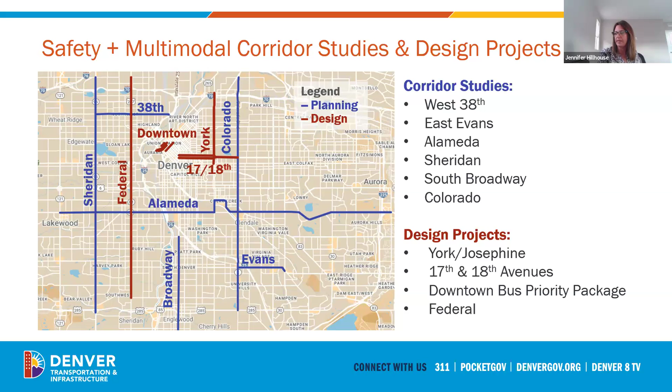So really focused in those priorities where the investment is needed most, the attention is needed most. So you can see the corridor studies that are in planning as well, and those are the corridors highlighted in blue. And then the design projects, things that we're advancing into construction, as York, 17th, 18th, our bus priority package, as well as Federal. So the first one up, Broadway, really, really important corridor. We just celebrated the multi-use path along the corridor and other enhancements for safety. But now the region is starting to look at how we reimagine Broadway. The extents here are 25 to Highland, so really extending the work that we've just done. And this is a collaboration, we know that our goals don't stop at our boundaries. We really have to partner with our sister agencies, sister cities to make sure that our regional goals are met. This project kicked off in the fall of 22 and is just coming to commencement with some of the recommendations. This is really looking long-term, a high-level visioning document setting the stage for where we need to drive investments into the future. And the final plan is planning to be published, or has been published, on the 8th, just yesterday.

So what we looked at here is long-term vision, really focusing on safety and mobility, but also looking at our commercial corridors along the corridor and economic development. With that, although we are looking long-term, under that umbrella, what can we advance in the near term to really showcase how this street can operate in different ways.

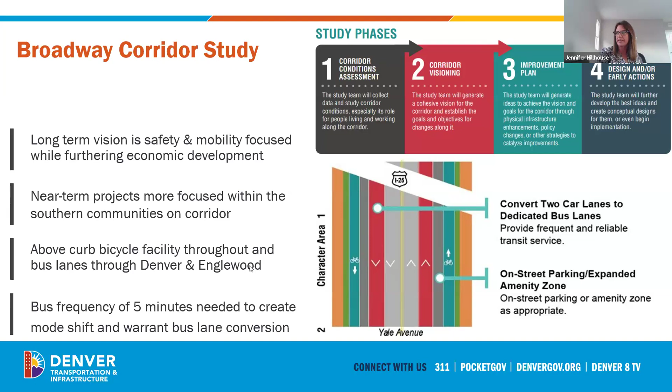We're looking at above-curb bike facilities throughout, as well as dedicated bus lanes through Denver and Englewood. That was really something to celebrate because we thought it was going to be a harder conversation, but certainly our region is coming along with this. And then looking at that bus frequency of 5 minutes to create the mode shift we needed along the corridor. So you can see a cross section, the final recommendation coming through that work.

York Josephine, another really exciting one, and I think one you'll hear from Amy about. This was another one where we set a long-term vision but also looked at near-term improvements, and it's moving into construction in July. We are taking 4 lanes and converting into 3. This is a high injury network, lots of crash history along the corridor, moving through a residential community. So really that 4:3 conversion is in a segment of the corridor, and then that longer term is what we think about to the north.

York used to tie into the highway and no longer does - it tied into I-70. So that allows us to think through this in a different way and really create a community street out here, and really slowing speeds is our goal.

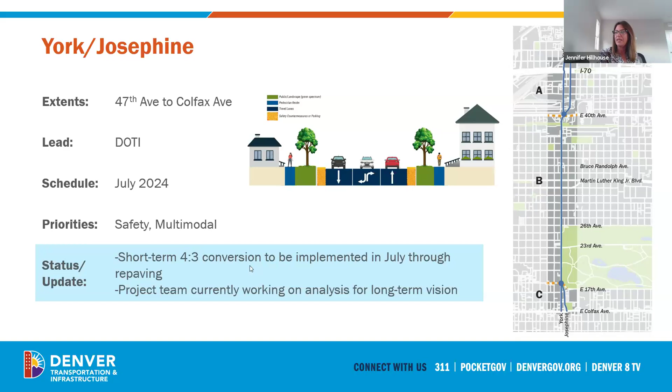Evans is another one, just recently moving through the process, but it will wrap up here soon. Colorado to Quebec, another high injury network - we are leading this process and really focusing on safety, multimodal, as well as green infrastructure, which is a high priority on this corridor. And how we can green and clean our water before it enters into the system. So we're in phase 2 of engagement, which will end this month, and then we're concluding our alternatives analysis.

This is also, and you'll see at the end of the presentation, what we call road safety audits, which we pull in to really think about short-term safety improvements we can do today, like through work orders, making immediate action along the corridor.

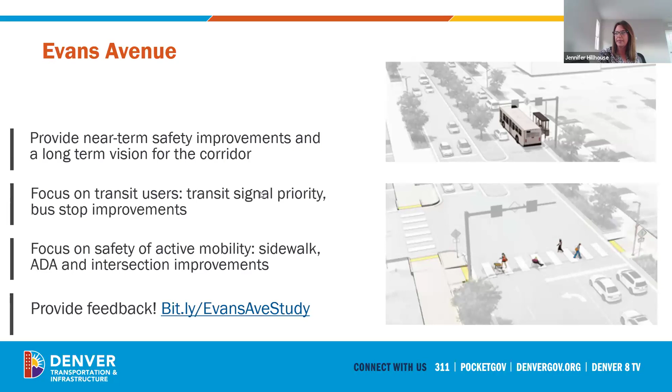So here's some of the concepts coming through. A lot of access management is the priority here. We have what we call a suicide lane - a middle lane that allows for left turns without a lot of organization and understanding of how we operate the street for vehicles specifically. So how we clean that up through potential medians, but also giving priority to our transit as well as people walking and ADA accessibility. This is one you can get involved in, and it would be great to have your feedback on.

Alameda is the next one. This is being led through DRCOG, but certainly we see ourselves almost as a co-project manager. This is moving through Lakewood and into Aurora, looking at the entire extent of Alameda. This is a BRT corridor, it's a high injury network - all of these are - but really looking at how do we connect, how do we provide that safety, improve our transit, and the vibrancy. That's the economic development piece.

So thinking about how we create the vision - you see some themes here - but also that short term, what we can advance immediately. You'll hear from Amy, and not to steal her thunder, but this is a focus area of ours. Alameda is a bright line, and not a great bright line, on the high injury network. So really, what is the action we can take right now? That could look like signal retiming - we saw great improvement on West Colfax, reducing our fatals by 87% just with signal retiming.

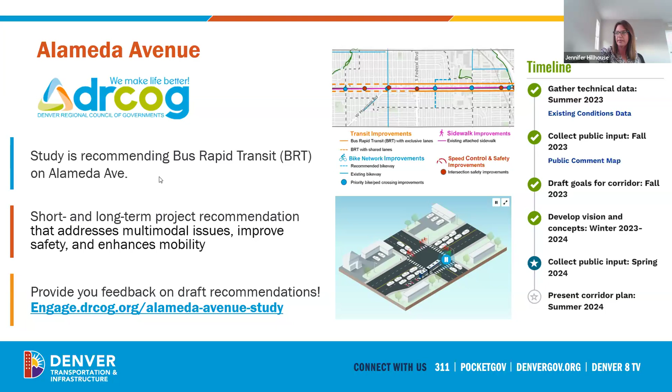Like sign density will come online immediately, and then also some of those crossing and intersection improvements that we'll be able to turn around really quickly out of this alternatives analysis. But it also gives us the ability, on all of these, to drive development and ensure that we're redeveloping the street with our partners in a way that aligns to an ultimate idea in a reimagined street.

38th Avenue, a really critical corridor for us in addition to all the rest - Sheridan to Federal. We are leading this and plan to complete it this year. This is also, of course, safety and multimodal, but green infrastructure is also a high priority on this corridor. We're moving through alternatives analysis today.

Really doing that analysis is where we're at. Then we'll move into design on those near-term recommendations and then developing that plan for the ultimate vision.

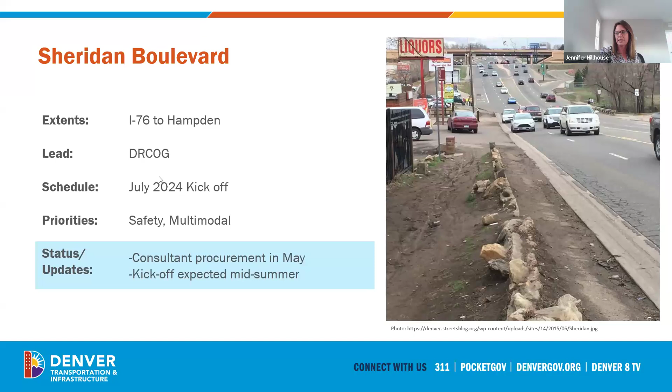Sheridan needs a lot of work, sidewalks specifically right-of-way is certainly a challenge. This is also a study being led out of the region, the entire extent from I-76 to Hampden. We are just kicking off, going through procurement now, and we'll plan to kick off in midsummer, really with a focus on safety and multimodal, but pedestrian safety is really the goal here. We're active in RFP now, so not a whole lot we can discuss since we're just kicking off, but the scope is looking at existing conditions. We'll have robust engagement with community, developing that ultimate vision, and then the short-term improvements.

Colorado Boulevard, this is kind of a two-pair. This is being led out of the state, out of CDOT, 52nd to Hampden. We plan to have recommendations this summer, and this is really a safety and multimodal analysis where the short-term improvements are coming in first, but ultimately it's about how we bring in bus rapid transit along the corridor. The state is committed to turning service in the very near term, but prior to that is understanding through that analysis what we can do in the interim. So that second part of the pair is the BRT.

This is advancing a full alternative analysis to get us prepared for federal funding to advance bus rapid transit. Three alternatives are being analyzed right now: mixed flow BRT, side running BRT, and center running BRT, similar to what you see on Colfax.

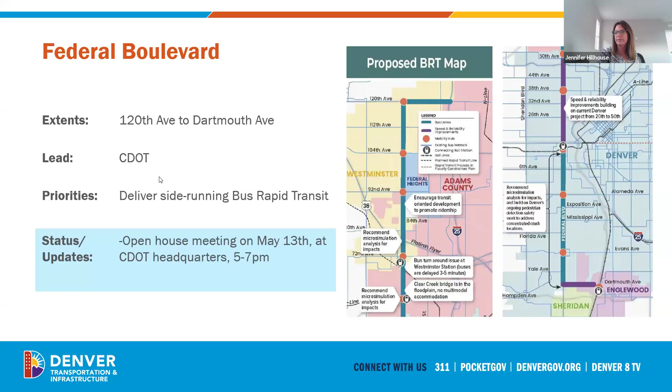And then Federal Boulevard, similar to Colorado, being led out of the state, out of CDOT. The extents are 120th to Dartmouth. We went through alternatives analysis, kind of pre-AA, and determined through city analysis that we would have side running, and that's what the state is advancing and looking at, turning service in that same time frame as Colorado, in 2030.

Then just wrapping up here on the RSAs, these weren't on the original map of the corridor studies because they're a bit different in process and analysis. These are road safety audits where we work to understand a crash picture and identify mitigation measures appropriate to that crash picture. The team goes out, we analyze existing conditions both in the dark and in day. We know that nighttime functions and operates very, very differently. If you think about Federal, we have 80 miles an hour.

Traveling along the corridor, where we might not see that in the day, so really making sure that our improvements align to all conditions. And these are really fast turnaround.

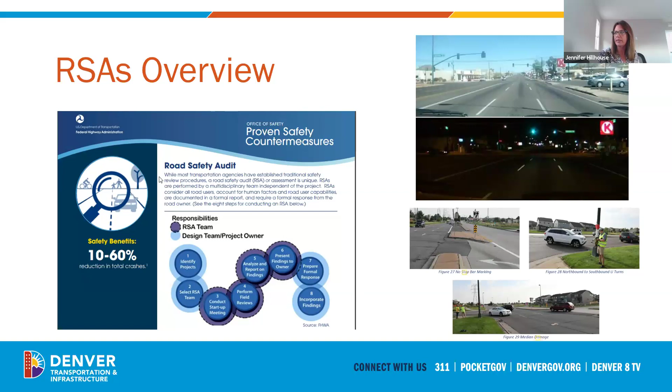So for instance, Evans isn't shown, but that is an RSA that we have working. These are part of a Safe Streets for All grant that we received. So if we think about Sheridan, that was one I shared with you all around DRCOG, this is embedded into some of that work and working to understand what we can do in the very, very near term.

So think quick build as we think about North Federal, Park, 20th, Sheridan, Quebec, Colorado Boulevard, pulling out, so we're coordinated within the efforts that are happening. But then the goal and really the outcome here is to invest and improve immediately.

And that is what I had for you. So I will stop sharing so I can see you and am available for any questions that you may have.

So that's a lot of work. A lot of it is concurrent work. And I think you said that although the designs, the outcomes, the recommendations are quite different among them, the thing that's in common is you're focusing on the high injury network.

Is that right? Yes, and the transit priority network. Okay, and the road safety audits, are those also high injury network focused? Yes, all on the high injury network.

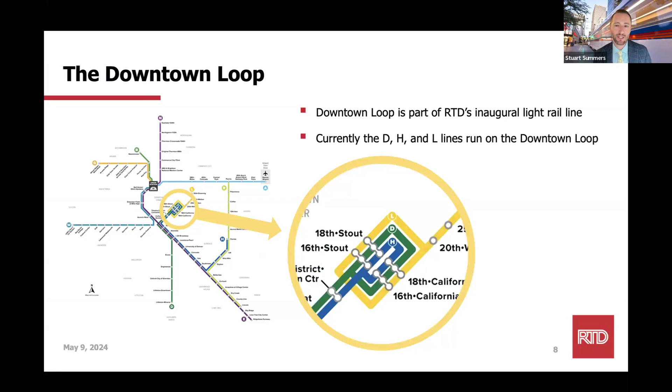So the first project I want to talk about is our downtown rail reconstruction project. This summer, we will focus on what we call the downtown loop. This is part of RTD's first light rail line, this inaugural line that opened in 1994. Currently, the D, H, and L lines run through the downtown loop, and as we're all well aware, the trains operate in a street-running capacity. So there's not a dedicated right-of-way, which means pedestrians, vehicles, and cyclists are also entering this right-of-way when trains are not there. There's a number of public utilities that exist under this rail alignment that we have to take into consideration as we're doing this project.

The downtown loop also has what we call paved track. Some parts of our system are open ballasted, which you can see in this picture on the right—this would be the track you would commonly think about. But in the downtown loop, we have this paved track, which takes a little bit extra work to do this full reconstruction effort.

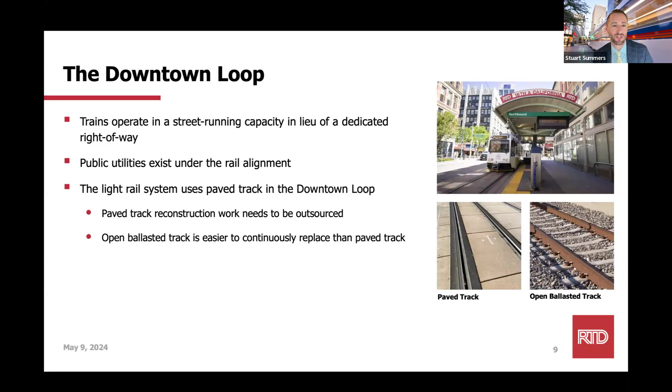Before I jump into this phase coming up this summer, I want to emphasize that we've been doing some isolated projects since 2012, and I think we're probably all familiar with some of the service impacts that have happened during this period of time. We've been targeting some very isolated parts of the track, and we've now reached a point where we can't continue to do these Band-Aid fixes—we have to do this full-depth reconstruction in a very focused manner instead of focusing on a little bit of track during periods of time.

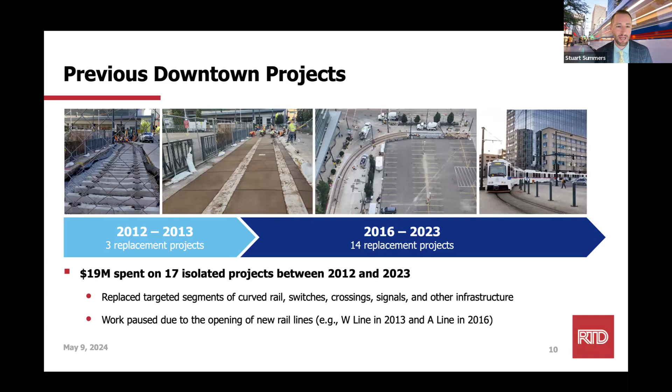So this project is focused on planned closures versus unplanned service disruptions. I mentioned that this part of the system is 30 years old, and it was built to last 30 years, so we're focused on what the next 30 years look like for light rail. How do we ensure that this investment is maintained?

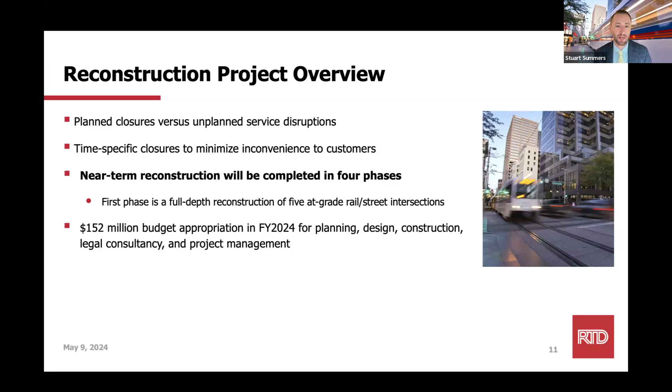This will happen over 4 phases in 2 years. The first phase, which we will be doing this summer—we're only doing one phase in 2024—are what we're calling 5 at-grade intersections. $152 million has been appropriated for all 4 phases. For this first project, we will focus on those 5 intersections.

I already mentioned the 30 years, really trying to ensure that we maintain these assets in a state of good repair and then mitigate these service disruptions in a planned manner.

So the 5 intersections project will kick off May 26th with our May service change and will run through mid-September, September 15th. Not all the intersections will be reconstructed at one time. We're going to do this through a progression, trying to limit this impact as much as possible. We've been working with the city and county of Denver on street closures, traffic detour plans, really trying to ensure that we're maintaining access to businesses and residents in the area.

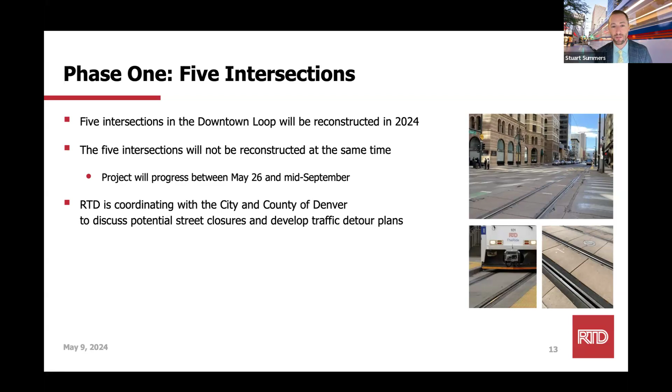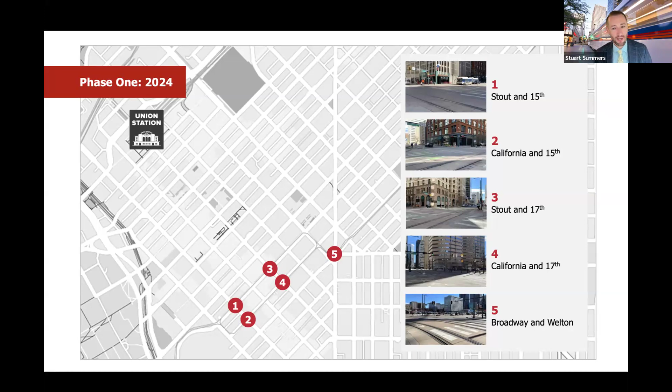So these are the 5 intersections that are part of phase 1, between May 26th and mid-September: Stout at 15th, California at 15th, Stout at 17th, California at 17th, and the Broadway and Welton intersection. As we're all very familiar, a lot of traffic crosses these intersections, driving over the tracks. After 30 years of vehicles, a lot of it RTD's own buses, it's really done damage to these tracks. So part of the reason is it's time to pull everything out, go down multiple feet, and do a rebuild.

So rail impacts for this project: the D line will be rerouted to Union Station, so we'll go from Littleton Mineral Station to Union Station. The H line will also be rerouted to DUS, going from Florida Station to Union Station. And then the L line service, which goes through the loop and out the Welton corridor, will be suspended during this project. We're encouraging customers to use bus route 43 — it closely mirrors the L line as a fantastic alternative if you're trying to access along the Welton corridor and into the downtown central business district.

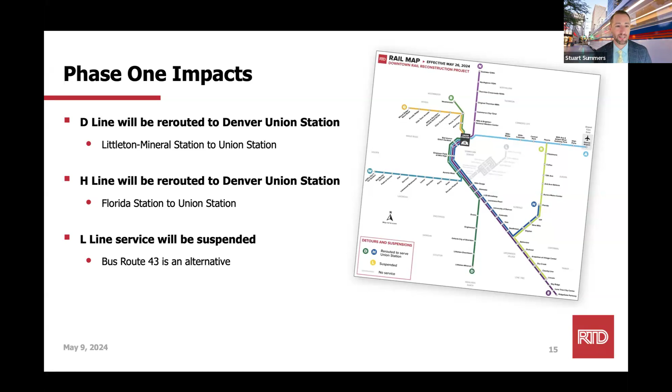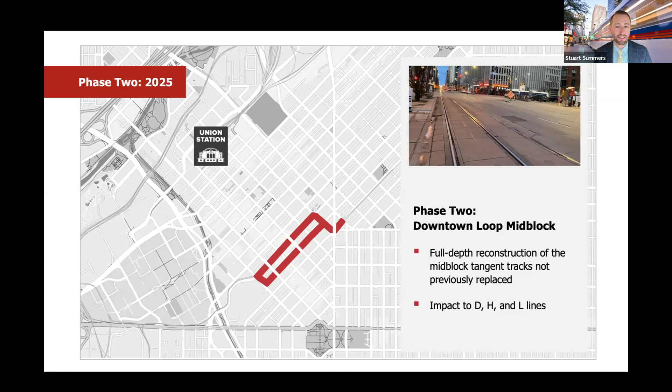In 2025, we will focus on phase 2, which is going back and doing repairs on a full depth reconstruction of the mid-block — the areas between the intersections that haven't been previously replaced. This will have that same impact on the D, H, and L lines.

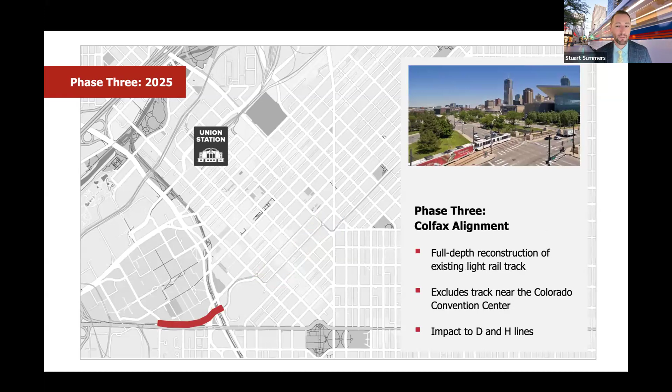Phase 3, also next year, will focus on the Colfax alignment, going out from the convention center out to about Colfax at Auraria Station, impacting the D and H lines next year. Phase 4 is the Welton Street corridor — same thing, a full depth reconstruction of the existing track on that corridor, also doing some station accessibility enhancements at that same time, with an impact to the L line in 2025.

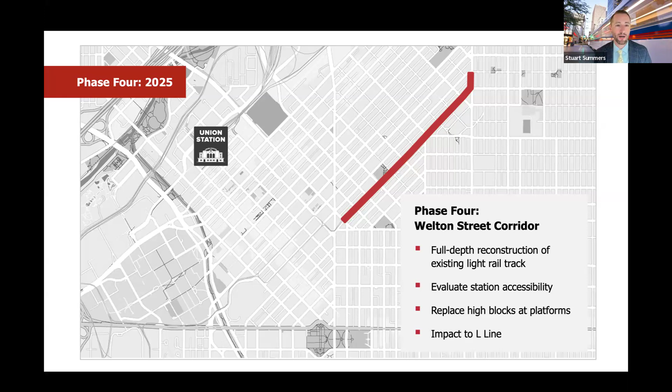So these are the 4 phases over the next couple of years, really impacting this oldest part of the light rail system. We've really been trying to be proactive at ensuring that customers, community, and stakeholders are very well aware of this project.

If you haven't visited our website, we have our Rail Project webpage, constantly updated with information. We're going through about 250 outreach tactics right now — we have a paid marketing campaign underway, a lot of banners, digital signs, social media outreach, really trying to ensure that the community is well aware of this project.

We're also underway visiting businesses and residents in the area to ensure they're aware of the impact and any questions they may have. We also have a stakeholder partner toolkit, so for this group especially, if you're communicating with community members or individuals who may be potentially impacted by this rail project, we have resources you can download in English and Spanish — news release copy, newsletters, sample social media posts, photos, video. All these resources are freely available for anyone in the community to use as you're helping to be an extension of our team and communicate some of the impacts brought on by this project.

The second thing I want to focus on is the coping panels project. This is the second and final phase of a 2-year project along I-25, impacting the E, H, and R lines. The coping panels are essentially those retaining walls that run along I-25.

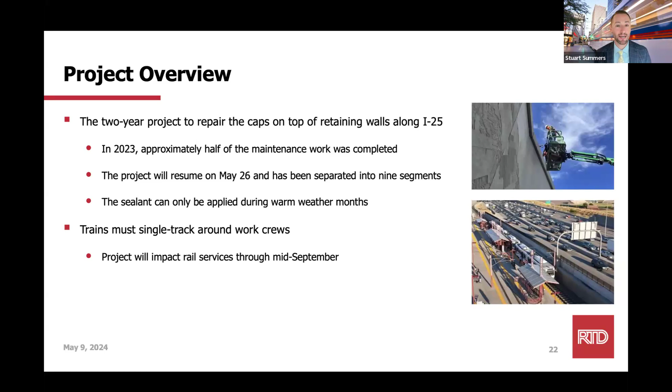I know this has been a very painful project. We hear a lot of customer questions and concerns about the coping panels project, but we are excited and looking ahead to having this wrapped up this year.

For service impacts related to coping panels, train frequencies will be temporarily adjusted between May 26th and September 15th. R line will continue a 30-minute frequency, and then E and H line trains will be adjusted to 1-hour frequencies. The reason for this is with that single tracking last year, we tried to do it at about a 30-minute frequency and realized we weren't able to keep a consistent schedule. So after meeting with a lot of community groups and getting a lot of feedback, we're adjusting to this 1-hour frequency because we feel we'll be able to provide a better schedule and better on-time performance.

Trains will still do that single tracking, but anything north of Southmoor Station will have 2 trains each hour that will go to Denver Union Station. So we're encouraging customers, if you're north of Southmoor, that's essentially a train every 30 minutes into downtown.

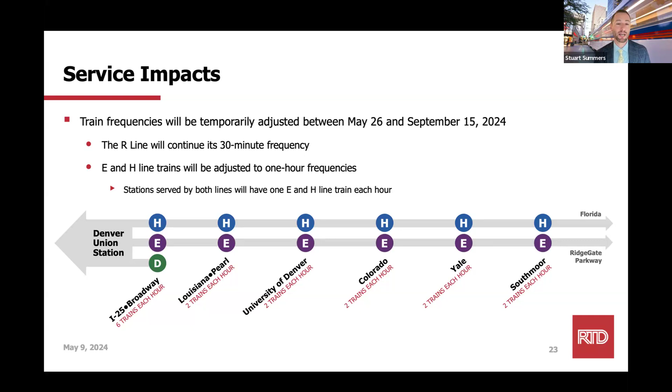Also, try exploring other ways to reach your destination, albeit by bus. There's a lot of bus service, and we're trying to help customers understand there may be other alternative methods outside rail that you can use to reach your destination using RTD.

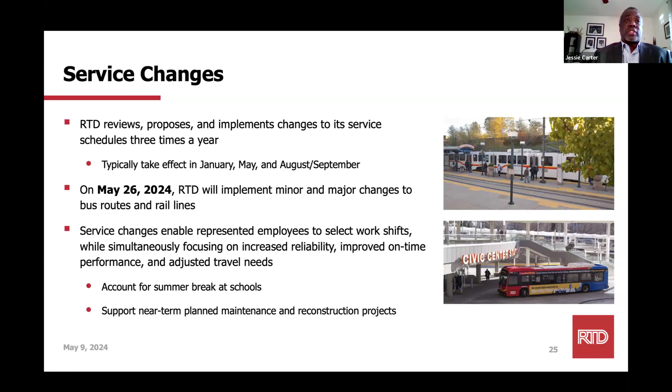So I'm not going to read every single one of these changes. I promise you that it would take too long and you'll probably be tired of hearing my voice already. However, we have a number of the changes that Stuart had mentioned.

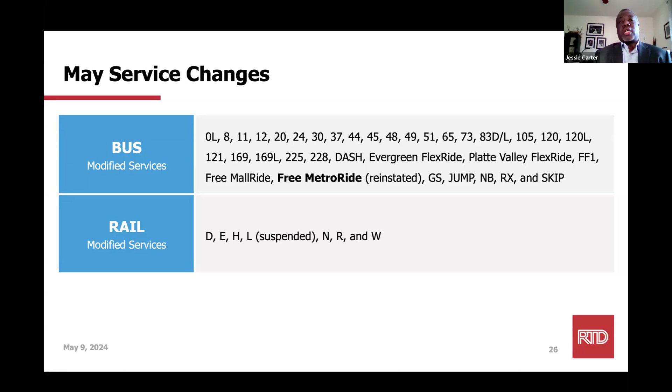Next slide. Hopefully what I've explained in the previous slide makes this slide a little easier and shores up exactly what we're talking about as far as our span of services and how they're impacted, and more importantly, how they're not impacted.

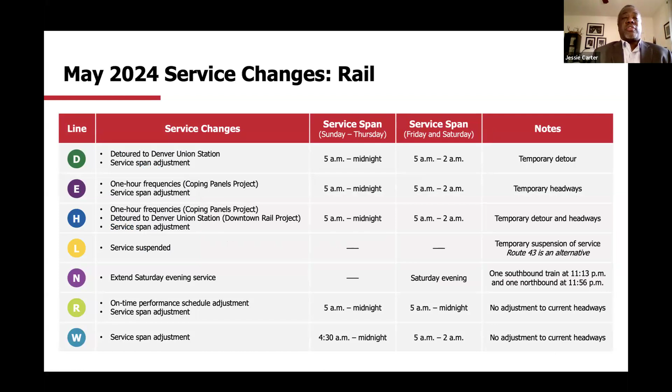Looking at the D line, the detour to Denver Union Station - some of you might remember the old C line, which we used to operate between the Southwest Corridor and Denver Union Station, so it'll be on that pattern. The E line will have 1 hour frequencies with service span adjustments Sunday through Thursday, but not Friday and Saturday. The H line will also have the service span adjustment and 1 hour frequencies due to the coping panel.

And the L line service will be suspended. For that suspension, we are pointing people to Route 43. Yes, we know Route 38 is also another alternative, but we're pointing to Route 43 because it actually has capacity to take on the additional ridership, and also provides a direct connection to Auraria, which we know is a very strong ridership generator for the L line.

On the N line, as I mentioned before, we're extending Saturday evening service. The R line will also have some impacts - minor changes due to the fact that the coping panel schedules will be adjusted. The W line will also be impacted in the same way as the rest of the light rail services, with service span impacts.

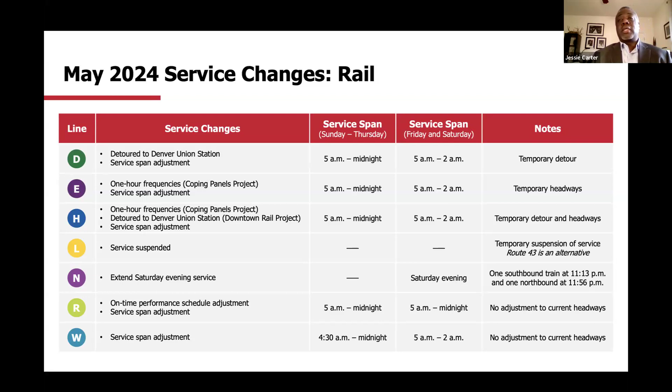As further description of how we're trying to mitigate the fact that the downtown loop is not operating, we are providing the 0L, as mentioned before, but also the reinstatement of the MetroRide will allow us flexibility, along with the free MallRide, to offer trips in and through the downtown area. The free MetroRide is scheduled to operate between 5:40 a.m. and 7 p.m., and the free MallRide will have its current level of service but will only operate at a 10-minute frequency.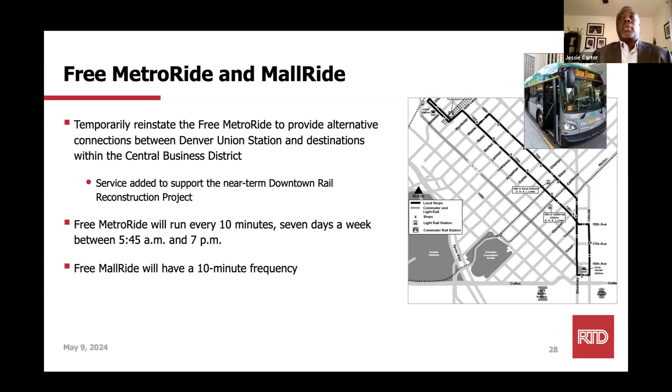In conclusion, I want to highlight a few resources and updates related to RTD services. A question came in about security and personal safety across the system. I want to provide an update that currently RTD has about 60 post-certified officers. A couple of years ago we had 19, so they've made some steady growth. We have 20 recruits in the police academy that will graduate this month.

So we're focused on increasing the presence so we can dispatch them appropriately across the entire system. Also, this last weekend, we introduced an overnight shift, so we now have 24-hour police support across the entire system. And then we're focused on hiring mental health clinicians and homeless outreach coordinators, which will be added to what we currently have this coming year.

If you're not aware, we have our Transit Watch app. This is a quick and easy way for people to anonymously report concerns that they see on the system. All of these are tracked by our dispatch in real time. I can tell you I use this personally when I'm on the D line and have reported concerns and had security dispatched within minutes and had things addressed.

And so it's available in English and Spanish. It's free to download. Also, customers can call dispatch or even text with dispatch 24 hours a day. One thing we're excited to introduce this month is the Impact Team.

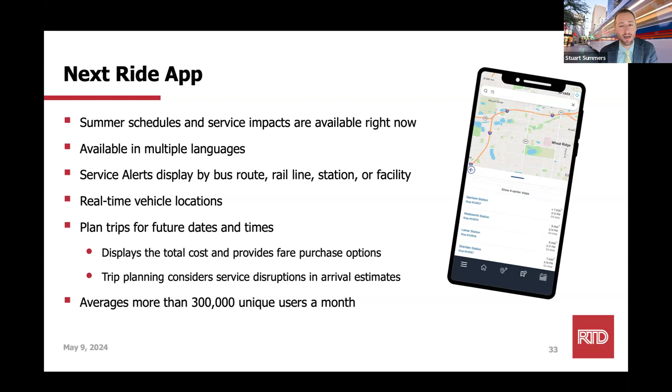This is really a great tool if you're working with people and they're trying to understand how to use the system. The Next Ride app provides all that information, how to purchase fare, and the total cost of a trip. And then the last thing is our call center. We have agents available if anyone has concerns and maybe doesn't feel comfortable using the Next Ride app. Welcome to call our call center, and agents can help provide real-time information, trip planning information, updates, and address any concerns that may come in, with language assistance available as well.

And that concludes what I have prepared, and happy to answer some questions. Now, let's see if we can get in some rapid fire questions.

Thomas had a question about the 0L. So the 0L has a major 1 mile gap between 9th Avenue and 1st Avenue. That has a pretty good amount of employment, even though the Speer Highway goes right through it. Is there any way that we can adjust it so that at least 5th Avenue or 6th Avenue is covered in order to accommodate those people that work in that half mile, or in between that mile?

I should have mentioned it before, I brought a friend along to help me answer questions. Dan Merritt is our senior service planner scheduler for the West area, which also covers downtown. I did ask him if he could answer that question. Dan?

Hello, thank you, Jessie. I was working on getting an answer together in the chat, but I can just do it verbally now if that's good for everybody. As a limited route, one of the necessities is a limited number of stops. For the Zero Limited to serve its job of getting people quickly from Civic Center down to I-25 and Broadway, we need to limit the number of stops available so that it can quickly progress down and go back to downtown and get more people.

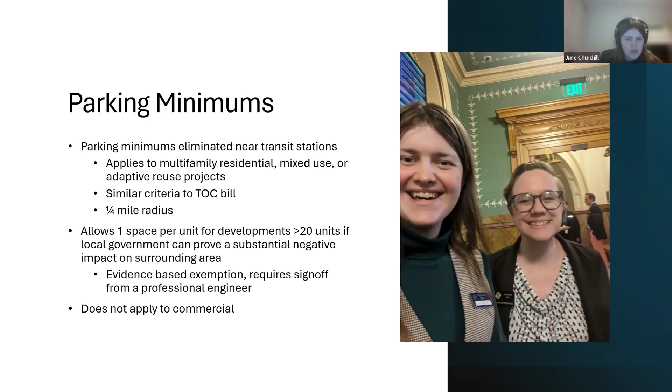It does not touch commercial properties, although I imagine maybe in a future year the legislature will come back and take a second look at commercial parking minimums. Because right now, for example, we require parking spaces near bars, which is a classic example of maybe somewhere we should reconsider parking minimums. And then finally, other land use and housing.

We want to focus on more sustainable infill projects. Other really big ones, ADUs are going to be allowed on all lots in Denver. This was something the city was already aiming for, but the state is just kind of getting ahead of us on it. There's a lot of loans and grants to help homeowners build new ADUs, which is very, very exciting. So if any of you are homeowners and maybe want to build an ADU for your kids, or to have a bit of income from rents, this is going to be a new possibility for you.

Occupancy limits have been banned in our state. Housing needs assessment - so essentially municipalities will have to measure what's the housing need in their community and estimate how much housing they have right now, to actually get a better sense of the housing crisis in Colorado. There's hundreds of millions of dollars in tax credits and incentives for housing as well. There's some very exciting new tenant protections like for-cause eviction. There's warranty of habitability changes, right of first refusal to allow for more affordable housing development.

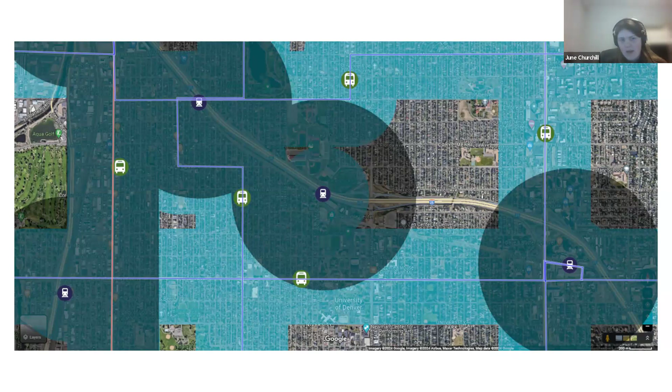But that shading is where we're going to have to calculate those housing opportunity goals, and then rezone to meet that total zoning capacity requirement. And then the blue here you see is where multifamily residential parking minimums won't be able to be enforced or enacted anymore. Part of the reason that these land use reforms died last year was because a bunch of local governments showed up at the Capitol and very reasonably said, hey, adding density is great - I mean, a lot of them didn't say that, but it was adding this stuff is fine, but you can't add it without new mass transit service and expanded transit services to make sure that these people can access jobs and amenities, the grocery store, childcare, and all that sort of stuff.

In that transit bucket, we can expect operations and ridership increases to get 70% of the funds. So these funds are majority going to actual operations, which is fairly rare from my understanding. 10% is matching funds that can be claimed by local governments and other municipalities and entities for projects like multimodal access to transit, station improvements, and bus stop improvements through competitive grants to improve transit access. The other 20% is for passenger rail.

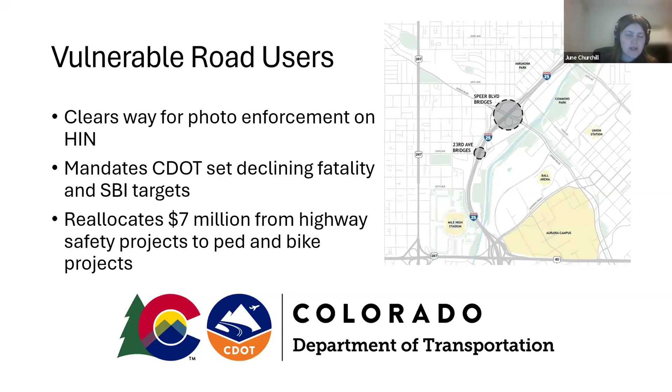I posted a picture here of the Speer Boulevard and 23rd Avenue bridges. I think the conversation I'm seeing around those is showing a serious culture change within CDOT, moving away from level of service and more towards traffic safety.

Some other miscellaneous things that I didn't cover, just didn't fit into other sections. There's a new bill that increased educational requirements for minors seeking driver's licenses and permits.

That sailed through pretty easily. There's some changes in other motor vehicle offenses, but that happens every session. Nothing that I thought was worth highlighting.

And then finally, there was a big transit reform bill that you might have heard of, House Bill 1447. It died after significant community opposition, but I counted three provisions from that bill that were dropped into other bills, all of which I'm okay with.

Okay, great. So thank you all so much for listening. I know that was a fire hose of information, and I cannot see chat or questions right now since I'm just staring at my presentation. But I'm happy to take questions, to talk about the process, to talk about these bills in more depth, and to answer some concerns and stuff from folks.

Thanks, and we do have a little more time. I just got texted from Amy Ford. Her son is being presented with an award at the end of the school year here, and she is in the audience waiting for his name to be called before she joins with us. So we have a little bit of time here.

All right, questions. We did have a question from Bruce about if there's any provisions for overriding existing regulations or agreements. Bruce, do you want to ask the question in your words?